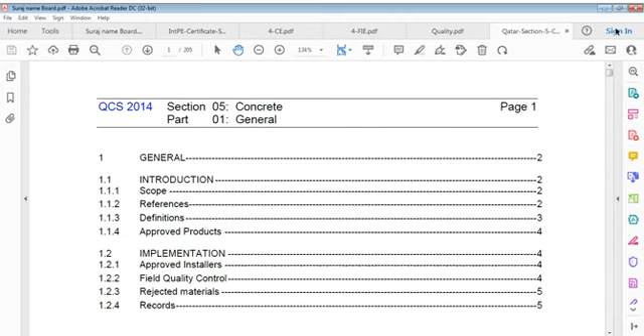We cannot actually go for it thoroughly. Last time also it happened, I was discussing on this, and quality is an important matter which we have to consider.

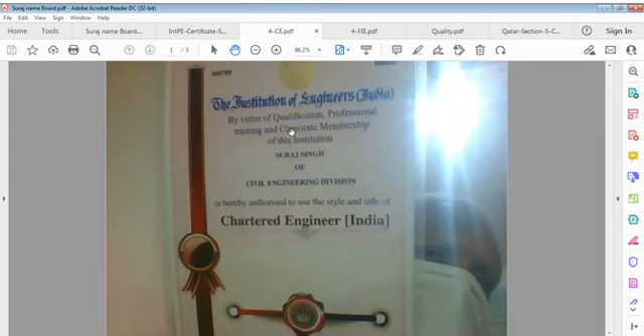Gunavatta has no limit. Gun means merit, positive merit, and standards are very important in life. Quality is of course a serious issue, a very serious issue, but can we take it seriously? That point we have to understand.

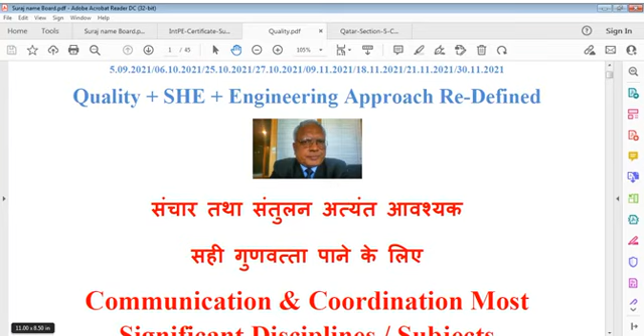Same way, when your life has malfunction, you feel a little pain or unhappiness. Same way, a product tells you that I'm not well, I've not been produced per requirement, I cannot perform, I have to perform at a little lower degree, and you are surprised. That's what I say - you have to communicate to the product also, but we can't.

We say, okay, this is a defective product, we can dispose of it at a discounted price. People think the purpose is just to get rid of it and not worry about how to improve it. In the quality system, we have provision for this.

Generally, the equation is plan, do, check, act. This is very common - we have to plan something, we have to do something, we have to check what we have done, and then if we find problems, we have to set those problems right. When you set them right, you improve it. First you bring it to the senses of the requirement, and then you have to think of how to improve it.

So in planning, or in procedures, rather than saying planning or quality system, we can say plan, do, check, and act. There are 10 sections or 10 clauses in Annex SL which we use, and those 10 cover generally our procedures. Those cover system procedures, not control procedures - those cover something that we are able to understand. The quality system only enables everybody to understand, because it is written by the organization itself, to fit the form of quality Annex SL into its own working system.

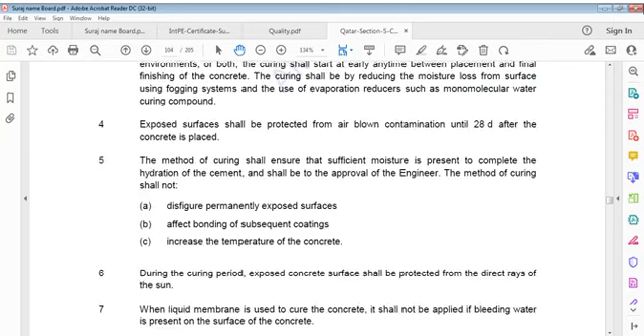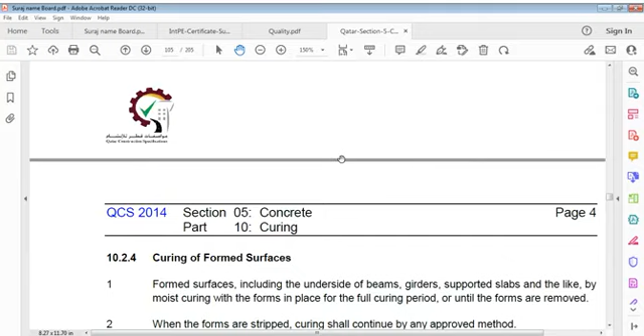Let's say how to go with this, and we can say, okay, curing of formed surfaces happens. It's better for everybody to refresh. So let's say, water for curing. Water used for curing purposes shall conform to requirement of part 4 of this section. We'll see later on what this section is.

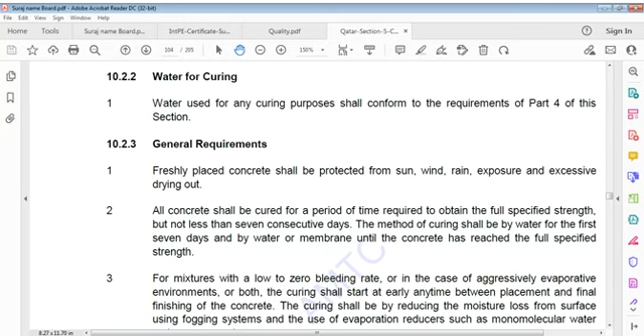Water used for curing purposes shall conform to requirements of part 4 of this section, and the general requirements are: freshly placed concrete shall be protected from sun, wind, rain exposure and excessive drying out. Freshly placed concrete shall be protected from sun, wind, rain, exposure and excessive drying out. All concrete shall be cured for a period of time required to obtain full specified strength.

All concrete shall be cured for a period of time required to obtain the full specified strength, but not less than 7 consecutive days. Method of curing shall be by water for the first 7 days, and by water or membrane until concrete has reached full specified strength. So it is said 7 days, but it depends on what is specified - this is a general requirement, not a specific one.

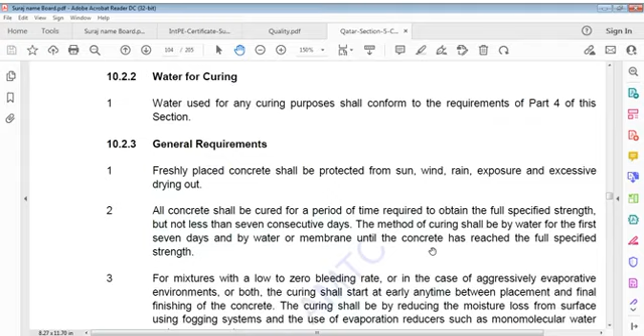So what we say here is all concrete shall be cured for a period of time required to obtain full specified strength, but not less than 7 consecutive days. Method of curing shall be done by water for first 7 days and by water or membrane until concrete has reached full specified strength.

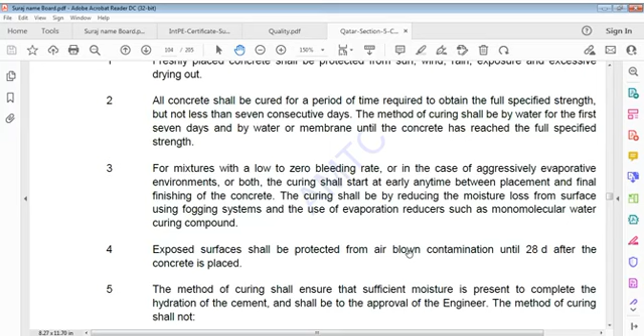For mixtures with a low to zero bleeding rate, or in case of aggressively evaporative environment, whatever time between placement and final finishing of concrete.

Using a fogging system and use of evaporation reducers such as monomolecular water curing compounds. Exposed surfaces shall be protected from airborne contamination until 28 days after concrete is placed.

28 days we say because this is expected to be achieved - exposed surfaces shall be protected from airborne contamination until 28 days after concrete is placed, and it gets full strength.

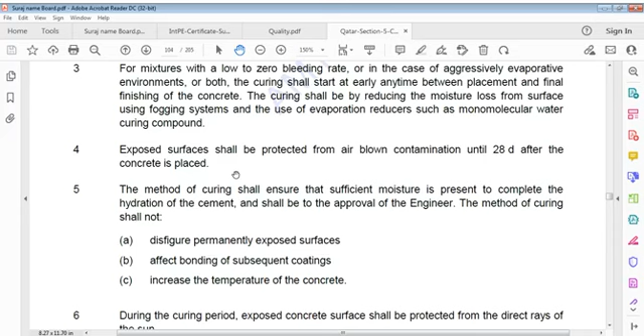Whatever method is adopted, it should not disfigure permanently exposed surface. Means our curing system should not disfigure a permanently exposed surface that is going to be exposed. It should remain as it is in its natural form. It should not be impacted upon by the process of curing, and it should not affect bonding of subsequent coating.

We have to apply plaster, or apply something else onto that. That should not impact upon bonding that exists between two materials, concrete surface and that application of coating protection - affect bonding of subsequent coating. So we can say temperature should not be increased, it should be decreased, during...

On surface of concrete shall not be applied - when there is bleeding water on the surface, we should not apply curing compound. For example, whatever liquid membrane we have, the applied film of liquid membrane shall be continuous. When we spray curing compound, it should be uniformly applied, and it must be protected from rain and other damages for at least 14 days.

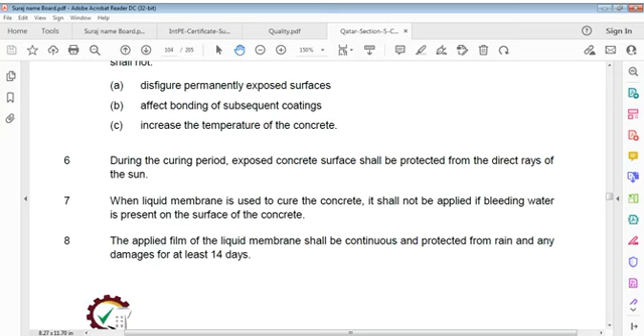Curing, after removing shutters, or you can say de-shuttering. In such cases concrete surface should be prepared prior to application of membrane as recommended by the membrane manufacturer.

It's a kind of membrane, a kind of layer that's formed on the surface of a column or wall. Of course, it's not visible, but what purpose do you think it serves? What shall we do with this membrane or this layer formed on the concrete surface? Its purpose is to keep water between this membrane and the surface of concrete intact. This means there should be presence of water between surface of concrete and membrane, which also says that before applying curing compound on that surface...

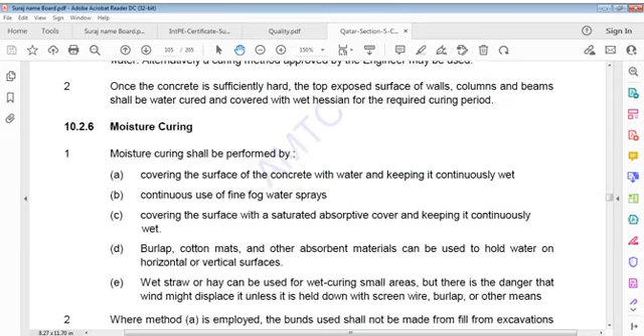Wet straw or hay can be used for wet curing small areas, but there is danger that wind might displace it unless it's held down with screen wire, burlap or other means. Where this water method is employed, bunds used shall not be made from fill from excavations or any other areas where there is possibility of chloride contamination.

This is talking about soil - we should not use soil that can contain chloride. So we have to use sand, possibly river sand - we call it 'reta' in Hindi, or you can say 'ramal' - and build compartments around to fill with water for moisture retention.

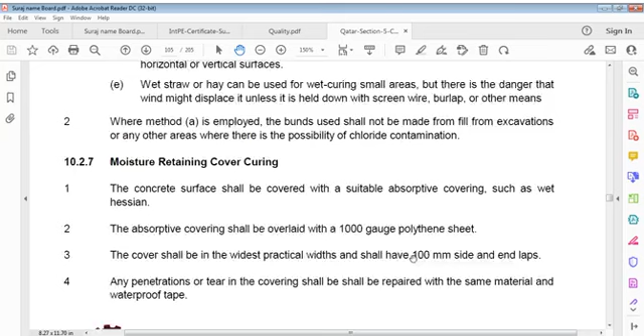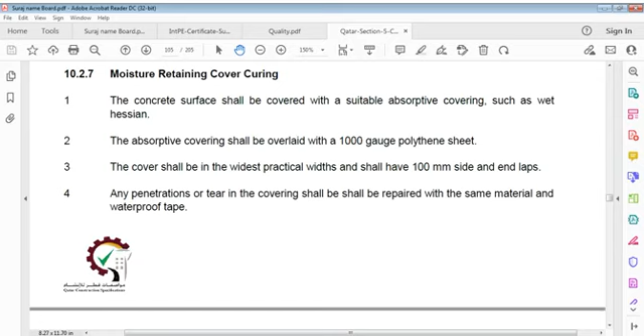Moisture retention through absorptive covering, that's what we say. The concrete surface is covered with suitable absorptive covering such as wet hessian. The absorptive covering shall be overlaid with a 1000 gauge polythene sheet as discussed before. The cover should be in the widest practical width, and penetrations or tears in the covering shall be repaired with the same material and waterproof tape.

Now, liquid membrane curing. Liquid membrane curing shall be in accordance with requirements of BS 7542 / ASTM laboratory tests for determining efficiency of liquid membrane forming compounds.

Membrane forming curing compounds shall be applied in accordance with manufacturer's recommendations, immediately after any water sheen which may develop after finishing has disappeared from the surface, and within 2 hours of stripping formwork on formed surfaces.

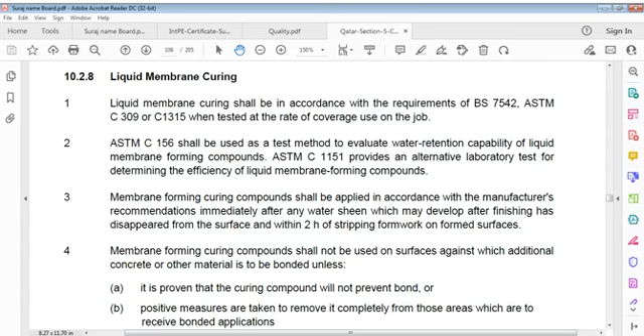Against which additional concrete or other material is to be bonded, unless it's proven that curing compound shall not prevent bond, or positive measures are taken to remove it completely from those areas which are to receive bonded applications on fair face concrete surfaces. That's the use of this compound.

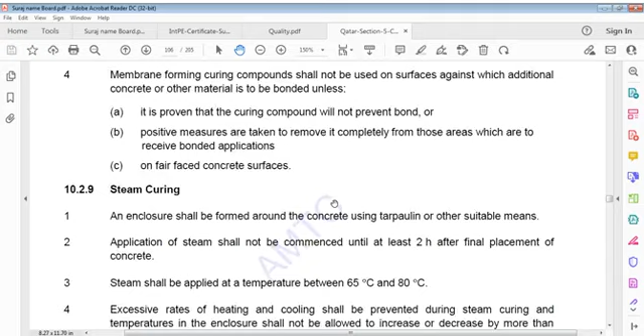Now steam curing. Steam is first of all a very important activity. It cures very fast every material, particularly precast. An enclosure shall be formed around concrete using tarpaulin or other suitable means. It's what says an enclosure is required, or you can say a temporary cubicle is required.

Application of steam shall not be commenced until at least 2 hours after final placement of concrete. At least 2 hours you have to wait before applying steam.

Steam shall be applied at temperature between 65 degrees and 80 degrees Celsius. That's a very important point. It's a good temperature - our body itself is around 37 degrees. 65 degrees is very hot as far as weather is concerned. You can say lesser than boiling temperature, which is approximately 100 degrees. So it is lesser than that, and that is steam. Like when you're cooking tea and it's not boiling but near boiling, when water tries to ooze out - that stage, that is steam temperature.

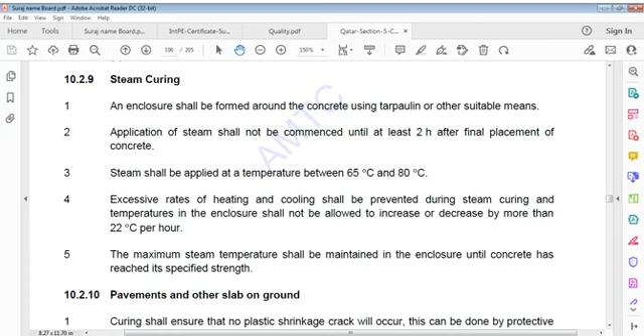Now, pavements and other slabs on ground - that no plastic shrinkage cracks will occur. That is the point we want in doing steam curing, that we do not see any plastic shrinkage cracks. Curing ensures that no plastic shrinkage crack occurs.

This can be done by protective measures such as sun shields, wind breaks, evaporation reducers, or fog spraying should be initiated immediately to reduce evaporation. It's very important that we control plastic shrinkage, and that is where curing is the answer.

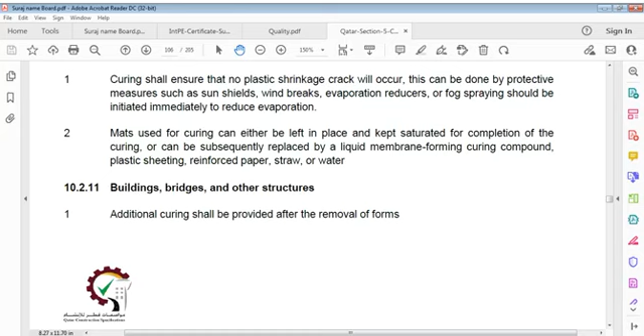After concrete has hardened, and while forms are still in place on vertical and other form surfaces, form ties may be loosened when damage to concrete will not occur, and water applied to run down on the inside of the form to keep concrete wet.

It's very simple, everybody understands it. Once concrete is hardened, you are going to cure it. You can loosen tie bolts or do something similar and pour water on top.

After concrete has hardened, and when forms are still in place on vertical and other form surfaces, form ties may be loosened when damage to concrete cannot occur, and water applied to run down on inside of form to keep concrete wet.

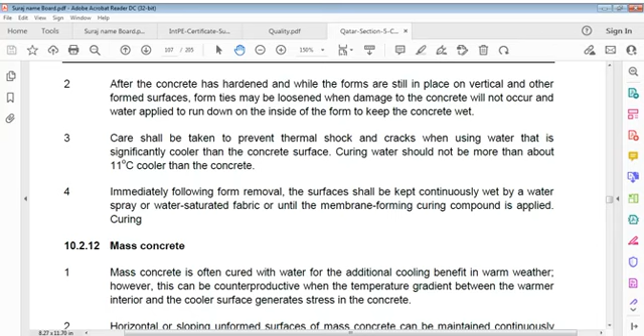People generally say that it has to be water cured for additional benefit of cooling, but it is actually reverse - it's not true, because higher difference in temperature between concrete heat and water can cause problems. There can be a thermal gradient problem which can lead to stresses in concrete due to thermal application. We have seen this thermal gradient - lowest temperature and highest temperature, the gap is more.

Therefore, for horizontal or sloping unformed surfaces, and for vertical and other formed surfaces.

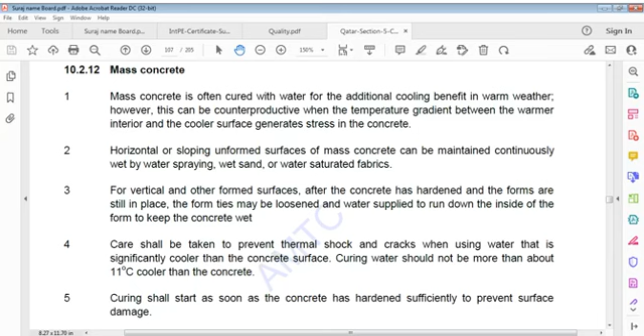Curing shall start as soon as concrete has hardened sufficiently to prevent surface damage.

For unreinforced massive sections not containing ground granulated blast furnace slag or pozzolana, curing shall be continued for not less than 2 weeks. Where ground granulated blast furnace slag or pozzolana is included in concrete, minimum time for curing shall be not less than 3 weeks, because it is slow setting concrete - of course it's non-shrinkage, but because initial setting is slow in case of pozzolanic materials or GGBS.

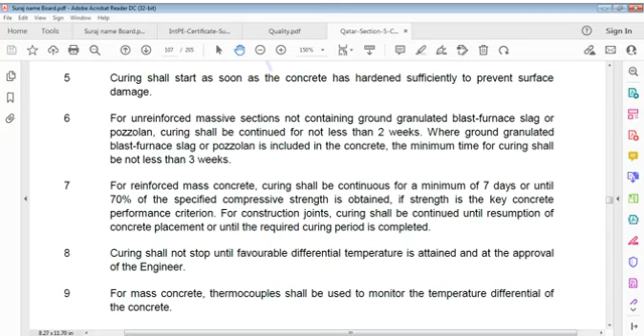Now, through the concrete part, placing of concrete - this was very important because placing activity is ultimately the end result of the product, of the structure. It's permanent work when you do placement of concrete, and concrete placement is a very responsible activity. It should attract the attention of every responsible personnel, particularly the contractor's representative as well as the engineer. Both must be responsible for good placement of concrete, because it is only at this stage of this item, concrete placing, that matters.

If concrete placing is good, per specifications, acceptable and satisfactory, then whatever designs we have done result in a positive approach - we could not have any guilt in mind or heart, saying 'I did not do that well.' That's why I did my job well. It's not because we're going to get paid or not, that's different, but the responsibility factor is very significant.

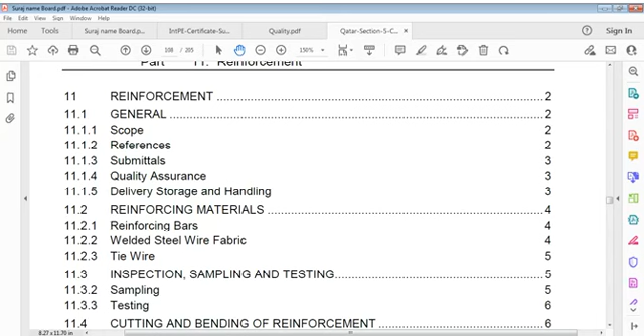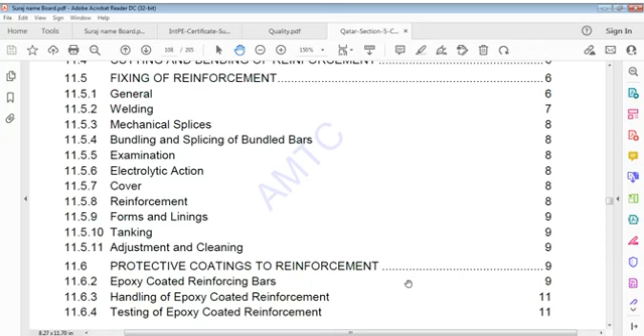Reinforcement forms and linings, tanking, adjustments and cleaning - here we have to start with reinforcement. It's like every topic, every chapter - we are going to study this informatively, so we can at least get some information about the works, what we check and what we don't check.

As I said, reinforcement in general includes tension, compression and temperature reinforcing steel, including welded wire fabric, WWF - generally that is mesh, we call it sometimes in common language. Where is BRC? BRC has no relation except that BRC is a company name in the industry that also produces reinforcement in the form of fabric or welded fabric. So this is tension, compression and temperature we have to think of in this concrete.

And of course we have to talk of epoxy coated reinforcing bars. This work of reinforcement includes furnishing of material, fabrication and placement of reinforcement for cast-in-place concrete, including bars, welded wire fabric, ties and supports, miscellaneous items, and structural precast concrete. And we can see the references as well.

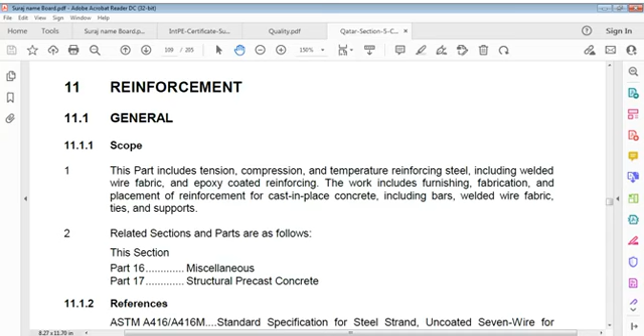Plain carbon steel bars for concrete reinforcement. Specification for low alloy steel deformed bars for concrete reinforcement. Standard specification for steel wire, deformed, stress relieved or low relaxation, for prestressed concrete railroad ties. Standard specification for filled epoxy coated seven-wire prestressing steel strand. Standard specification for deformed and plain stainless steel bars for concrete reinforcement.

Standard specification for deformed and plain stainless steel wire and welded wire fabric for concrete reinforcement. Deformed and plain low carbon chromium steel bars for concrete reinforcement.

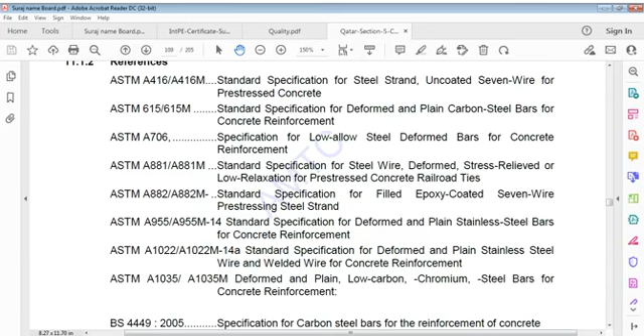Specification for carbon steel bars for reinforcement of concrete. Specification for cold reduced steel wire for reinforcement of concrete. Steel fabric for reinforcement of concrete.

Specification for high tensile steel wire and strand for prestressing of concrete. Specification for scheduling, dimensioning, bending and cutting of steel reinforcement for concrete.